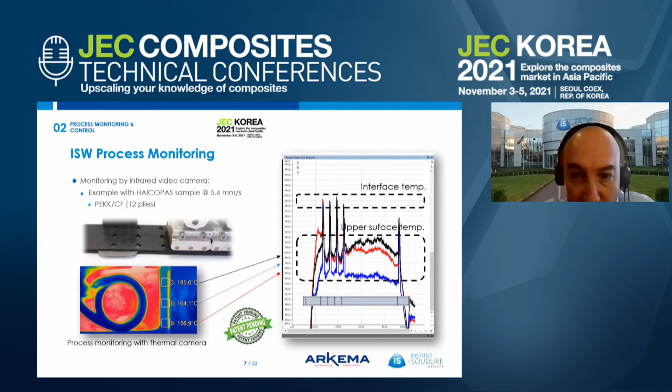If we have a look on the plotting of the temperature, we can see that, of course, when we are facing a hole, we have access to the interface temperature that is higher than the melting point of the thermoplastic. And when we are facing a solid surface, not in front of holes, we have access to the surface temperature, meaning that we are way below the melting temperature and we are not affecting the full component, meaning we are not decompacting and generating defects in the substrate. So this is one of the main characteristics of the technology.

After the item on modeling and on monitoring, we have a strong focus on the modeling because, as Pedro just mentioned, we have a strong expertise in LCM and all the simulation around RTM and infusion, and we have the same strategy for the welding. So we want to be able to fully anticipate and optimize the process through modelization.

So we are working quite hard on setting up a model that will allow us to fully simulate and anticipate the welding. So this is some illustration of where we are now. We have set up a 2D model and we are working on a 3D model that will be a multi-physics model in order to integrate, of course, the induction modeling, but also all the conduction that we have between the susceptor and the composite, and also through the thickness of the composite.

As illustrated here, we have the full simulation of the heating wave through the thickness, and this is a threshold that is only focusing on the melted area. So this is a strong focus that we have now on the modeling.

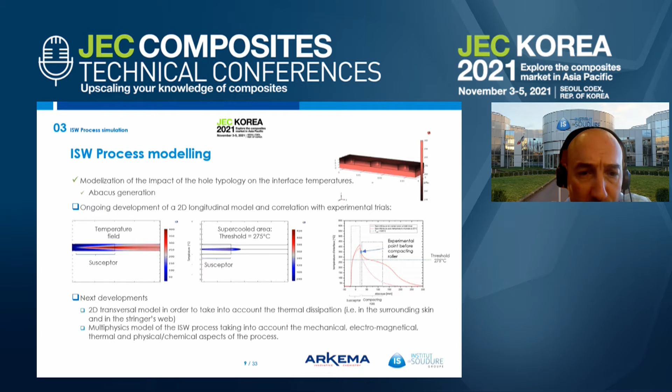Speaking about performance, we have a target that we developed with Stelia Aerospace. It is Airbus Group in France. And our target for the process is quite simple. We must be higher than 85% in terms of mechanical performance of the welding interface compared to the reference that is done through autoclave consolidation. So we must be higher than 85, 90%.

If we have a look first on the right side of the slide, this is an example of mechanical performance that we can get on a study that we are running right now with Stelia, but this is illustrating what we get usually. So if we compare the mechanical performance of the welding joint with the reference, in this case, we are about 100%, meaning that we are on target.

We have the same performance between, I would say, the raw material that is consolidated in the autoclave and the performance of the welding line. So we have quite a good status right now, and this is what we are targeting for the next.

Also, what we are targeting is to be able to weld any kind of material. So this is the case. We can weld any kind of matrix, starting from PA, polyamide, up to high performance material like PEEK, PEKK, and PEI, LMPAEK, and so on, and also different thicknesses. So this is what is illustrated in the table on the left side.

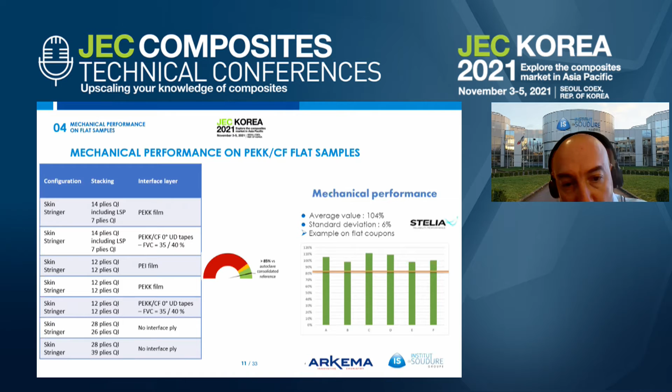Just a little bit about the performance, I would say, the capability of the process. So these are some micrographs that show you, I would say, that we have a good interface. The welding line is quite homogeneous with the substrate, and we have no degradation, no visual generation of defects at the interface.

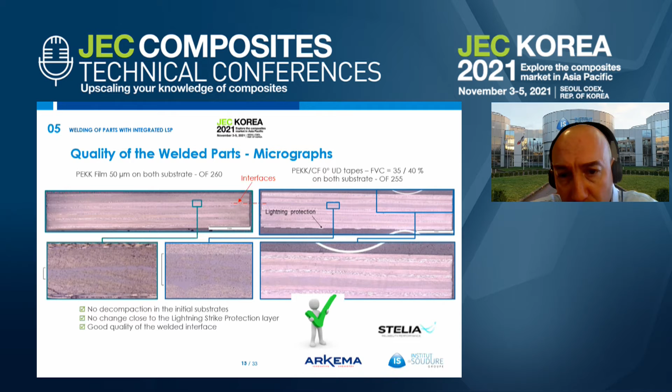And also what is very important is that with our technology, even if it's induction-based technology, it's indirect induction, so we are able to weld components with LSP, lightning strike protection. We know this is a requirement of aeronautics, to have this lightning protection, and we can handle this with our technology.

About chemistry, because this is also important to highlight the fact that we are not degrading the polymer at the interface, very close to the susceptor that is generating all the heat in order to induce the melting of the thermoplastic. So if we have a look at this GPC, molecular mass repartition.

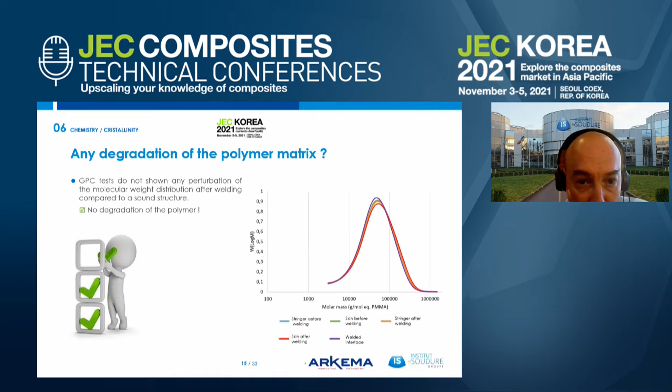This is an illustration on PMMA, because we can also weld PMMA, meaning the Elium resin from Arkema. But for any kind of polymer, we have done this, and we are not degrading the polymer at the interface. This is also important. Of course, we are working on the crystallinity level after welding. This is in progress, and it needs to be optimized in terms of crystallinity, but we are not degrading the polymer.

Also an important point, in terms of development, because I told you that we have already done some development, some projects. We have demonstrated some capability in terms of welding, in terms of shape, thickness, and so on. I will share with you after that. But we are moving step by step, and we are still improving in terms of the geometrical components that can be handled with our technology.

So we started with flat components, small coupons, up to flat skin with omega, Z, L-shaped stringers. Then after that, we moved to in-shape skin and in-shape stiffeners. And this is, I would say, where we are now. And I will share with you a little bit of what we have done already.

So this is the illustration of what we showcased at JEC for the JEC Award in Paris in 2020. It was, I would say, some flat skin with some I-beam stiffeners.

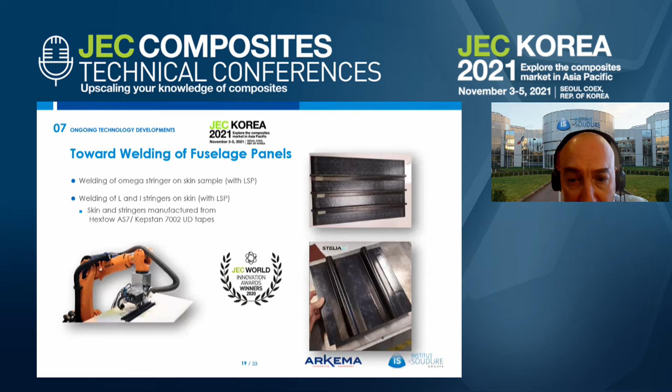Then now we are able also to handle some flat skin with omega stringers, with multi I-beam stringers, still with high performance polymers. So what we are showing now on the screen is made with PEKK resin and carbon fiber products for Stelia Aerospace.

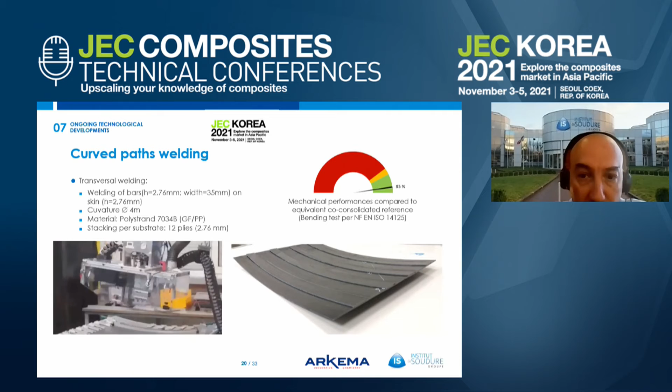Now you have an illustration of where we are right now in terms of in-shape, because as I told you, our main objective is to be able to weld some stringers on fuselage application, meaning omega and I-beam on in-shape skins. So we have set up a quite large demonstrator. This is the small one that is illustrated on the video. Quite large sample of tooling with a 4-meter diameter that allows to weld in shape. And of course we are still on target with mechanical performance. In this case it was 95% of the reference.

So Jérôme, 2 minutes left.

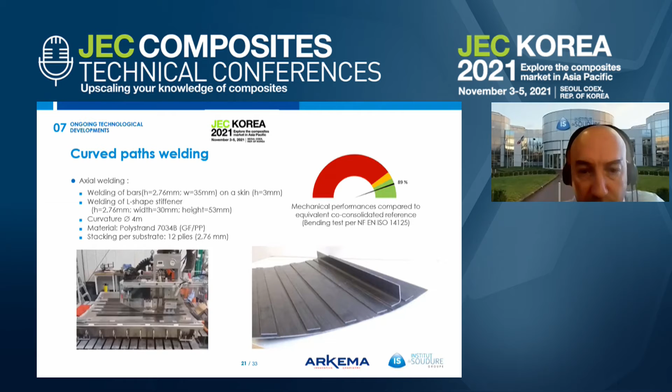Yeah, no problem. So this is for the welding on the other side, so axial and transversal welding lines, multi-stiffened panels that we can handle with our technology. So showing the versatility of the technology and of the equipment.

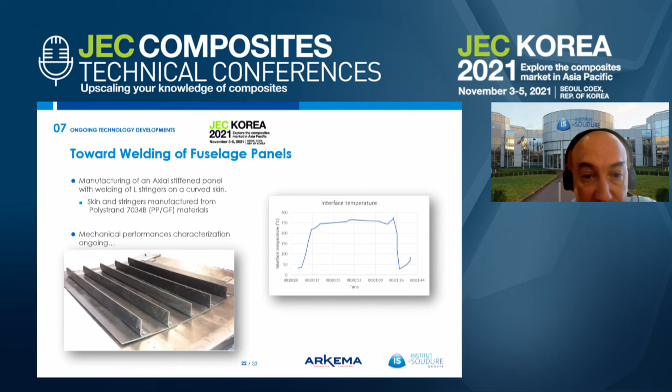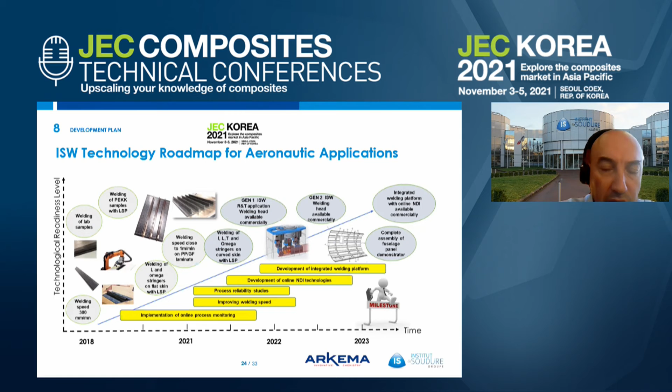We are also working hard at the same time to improve the welding speed. We are at around 0.5 meter per minute today, improving the modeling and also the monitoring. And we are also focusing a lot of energy on the NDT, meaning the quality inspection of the welding. So this is where we are now. Roughly, this is what I wanted to share with you.